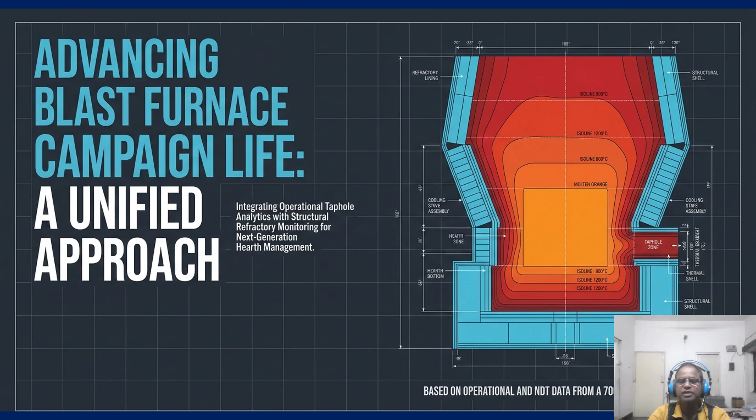Today we are going to discuss a paradigm shift in furnace longevity. We are moving towards a unified approach that integrates real-time operational taphole analytics with next-generation structural refractory monitoring. Based on data from a 7,000 TPD furnace, we will show how operational execution directly serves as the first line of defense for the hearth structure.

The challenge is clear. The hearth dictates the entire furnace life. Degradation happens on two fronts. The first, fluid dynamics, where uneven liquid level and poor deadman permeability alter gas flow and risk the furnace freezing and choking. Second is the structural stress, where zinc and alkali chemical attack combined with extreme thermal load erode refractory bricks severely, as is shown very clearly in the slide, both pillars.

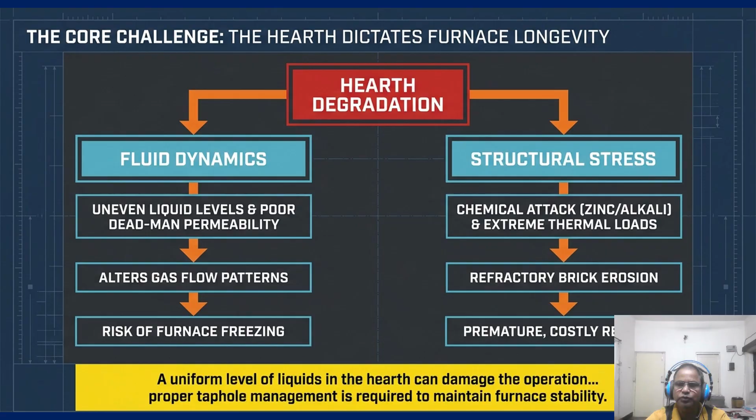Proper taphole management is the only way to maintain the stability required to avoid premature, costly relining. Why this is important is going to be summarized in the subsequent slides. To meet this challenge, our strategy stands on two pillars. Pillar one is operational optimization, which focuses purely on drainage management using casthouse historic data like drainage time, mudgun consumption, workmanship, application of the clay in the taphole spool, and so many things.

As far as pillar 2 is concerned, it is limited to structural monitoring, utilizing Acousto-Ultrasonic Echo, that is AUE, and 2D thermal models for proactive wear verification. In the earlier presentation, a part of it has also been discussed. Together, these pillars move us from reactive maintenance to unprecedented campaign longevity, and how it is getting done will be explained, covering all those topics in the upcoming slides.

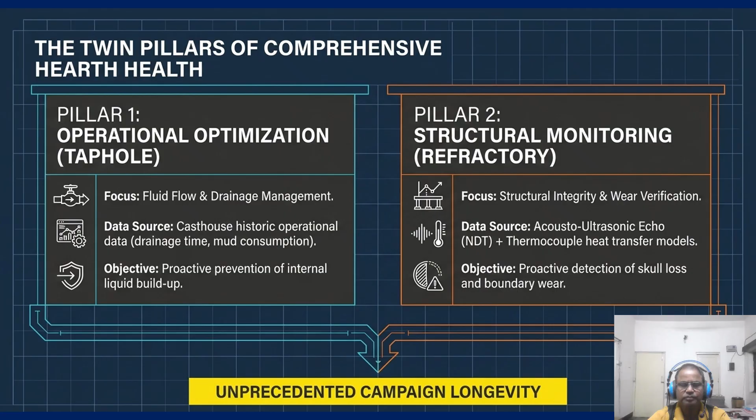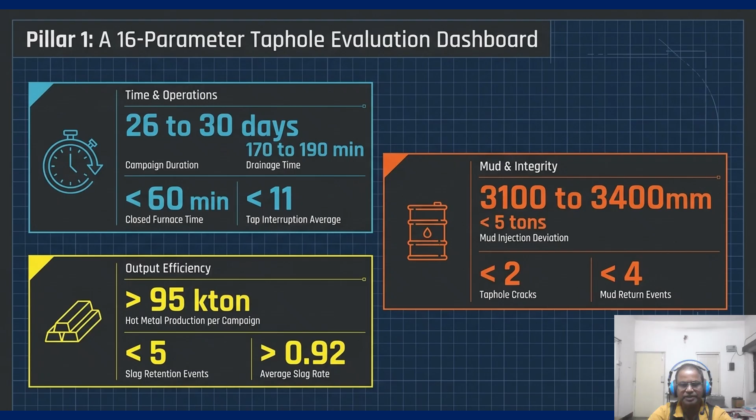So we manage pillar 1 through a 16-parameter evaluation dashboard. We are not just looking at production, we are tracking precise targets: campaign duration of 26 to 30 days, drainage times between 170 and 190 minutes, and maintaining taphole length between 3.1 and 3.4 meters. So by monitoring the deviation in the mud injection and slag retention, we can grade the success rate of every campaign with total objectivity.

Now coming to optimizing casthouse operation, which is one of the major activities in achieving those targets. But how do we hit these numbers as shown? It requires three operational disciplines. And what are they? The first one is the consistent use of a 55 millimeter drill diameter, utilizing mud with a high extrusion index for superior sealing, and minimizing operational procedure corrections, consistent fluid flow protects the inner hearth boundary, directly linking our daily casthouse discipline to the structural survival of the furnace.

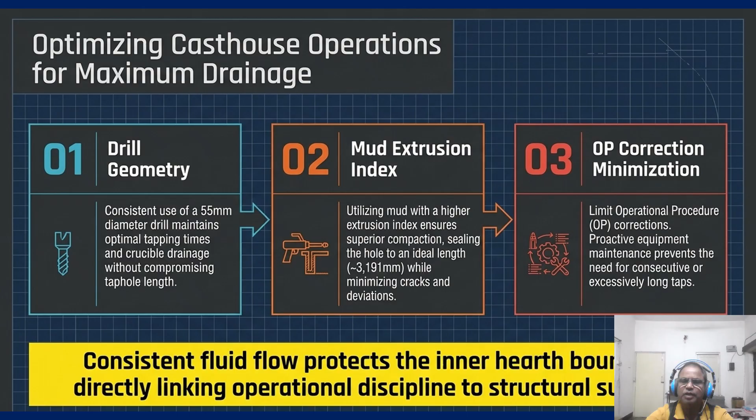Now coming to pillar number 2. While we optimize the operation, we must also improve how we see the refractory. Legacy 1D thermal modeling relies on the flawed assumption of uniform heat transfer. The hidden reality is more complex. Thermal inertia masks short-term changes, the elephant foot effect creates critical wear in the bottom corner, and chemical degradation can reduce the thermal conductivity by roughly 66%. 66% is a big value. And once temperature exceeds 850 degrees centigrade, this activity goes in a very accelerated form.

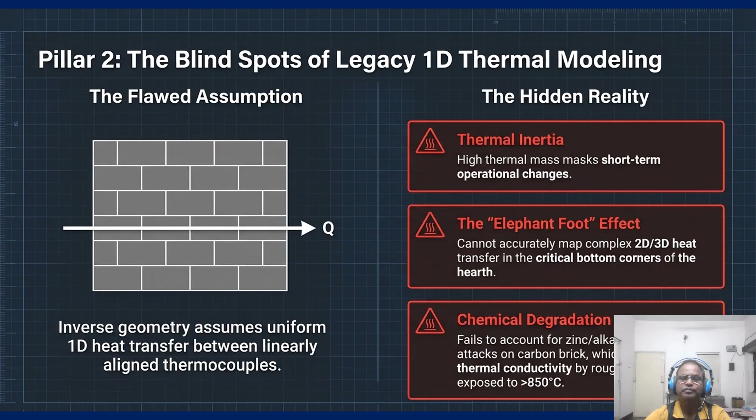Now, our solution is to combine Acousto-Ultrasonic Echo with 2D thermal mapping. AUE uses stress waves to detect boundary anomalies and refractory thickness without stopping production. By pinning the structural boundary with this NDT result, we eliminate the blind spot of thermocouple-only models, allowing for precise prediction of protective skull thickness and chemically attacked zones, which is going to have a lot of implications on the outcomes.

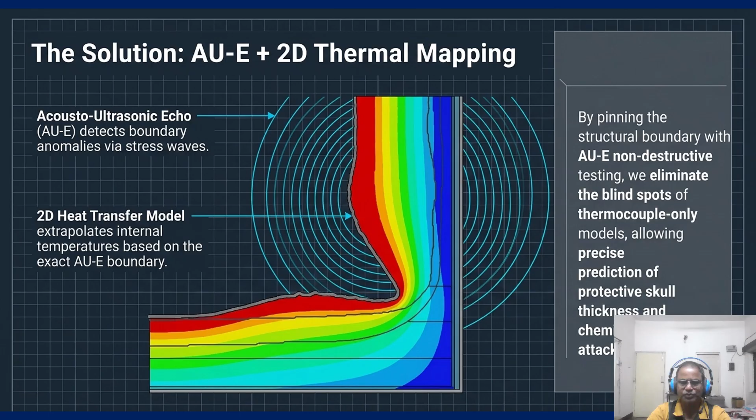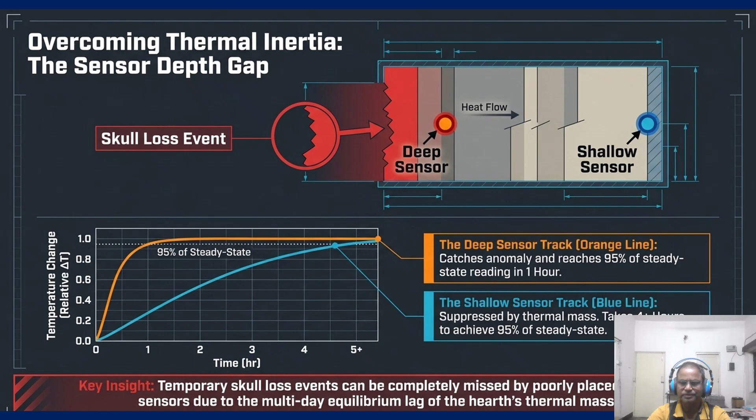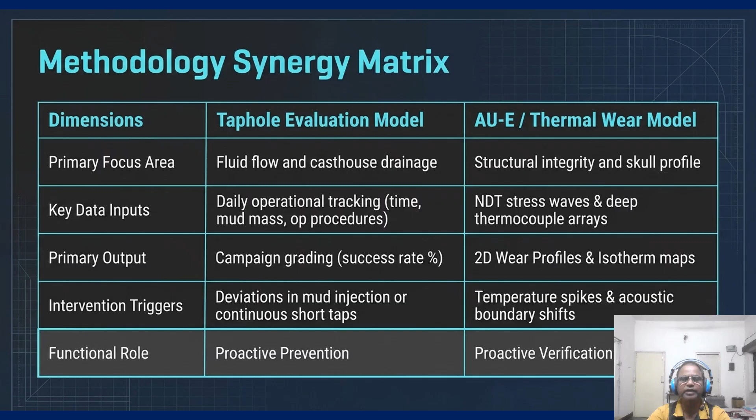Now this matrix shows how the models work in synergy. The taphole evaluation model provides proactive prevention by tracking daily operational data to grade campaign success. The AUE and thermal wear model, which we talked about earlier, provides proactive verification by generating 2D wear profiles and isotherm maps. So we use intervention triggers like mud injection deviation or acoustic boundary shift to adjust our strategy in real time.

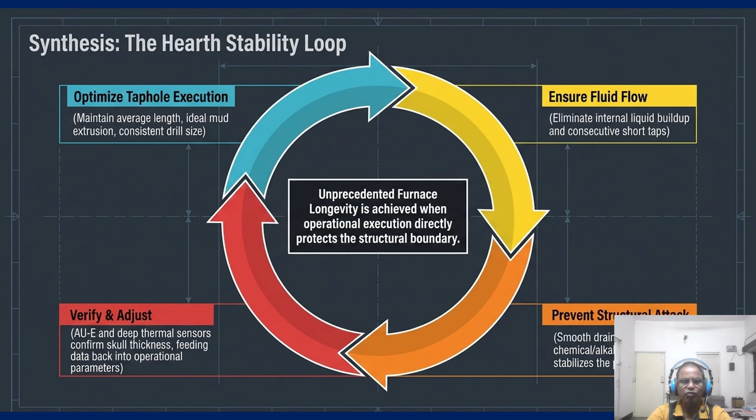In conclusion, our clear deliverable is the implementation of the hearth stability loop. We optimize taphole execution to ensure fluid flow and eliminate liquid buildup. This prevents structural attack by stabilizing the protective skull, and the protective skull has a big role, as we have discussed regarding sensor feedback to the operators, and accordingly operators draw or simulate the wear profiles of the hearth. Finally, we verify and adjust using AUE and deep thermal sensors, feeding that data back into our operations. Unprecedented longevity is achieved only when operational execution directly protects the structural boundary.